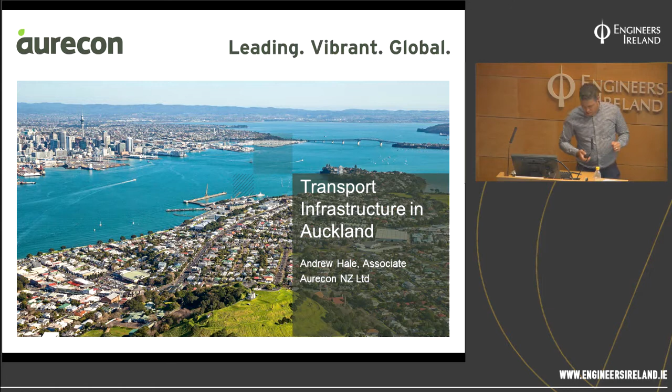So I'll just give a brief introduction to myself. As Oliver said, I graduated from Liverpool University in civil engineering. I was actually in the UK a bridge engineer, so I designed, inspected and maintained bridges for approximately 7 years. Those 3 companies there: Mouchel, Atkins and Carillion. Atkins is probably the one you guys would know. The Mouchel joint venture was an organisation in the Lake District, looking after the bridges on the M6.

After 7 years in the UK, I thought I'd go and see what's happening abroad, and I was only supposed to be there for 2.5 years. 10 years later, I'm still there. Whilst I was in New Zealand, I became chartered with the Institution of Civil Engineers, and recently, late last year, I actually became a PMP with the Project Management Institute in the US. I also, around the same time, became a New Zealand citizen, so I'm actually a Kiwi now. And I've been leading the transport project management team in our Auckland office for approximately 2 years.

Since 2006, when I joined Aurecon, the transport team only had around 25 people. Now we roughly have around 110, 120 people in that transport team, and it's mainly down to the project I'm just about to show you.

So Aurecon, you probably haven't heard of Aurecon. No, nobody's heard of Aurecon? They're not in Europe, they're mainly in Australia, that's where they have the biggest presence. It was previously called Connell Wagner. It merged with 2 South African companies, so they now have a presence in South Africa, the Middle East, Southeast Asia, but mainly in Australia. Currently around 7,000 employees. It's privately owned, so there are 900 shareholders, which I'm one of.

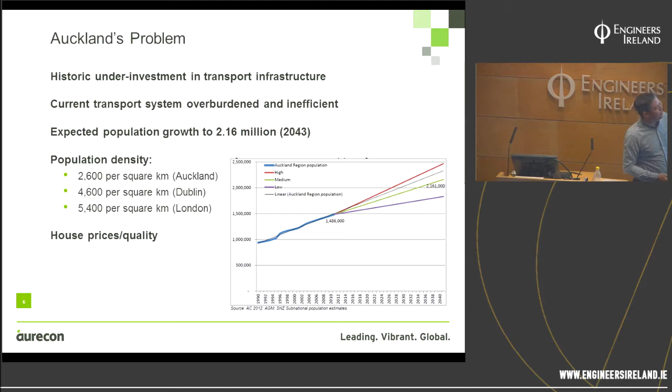They've tried to solve it by bringing in the Auckland Plan. As part of this plan, they want to become the world's most livable city. There are rankings, one from Mercer and the other from the Economist Intelligence Unit. What they're trying to do is become number one, but when they assess infrastructure in Auckland, it brings it down a peg or two. At the moment we're third with Mercer and ninth with the Economist Intelligence Unit.

The Auckland Plan is a new plan that the newly formed council has come up with. They want to become the world's most livable city, and they're going to invest in infrastructure as part of that. I'll show a few videos, not too long. This one's probably the longest, and it'll give a snapshot of the problem happening in Auckland and how they're going to solve it.

I'm starting here in Pukekohe because there's already a lot going on. There are new suburbs, schools, shops, roads in, roads out, which is great if you're looking for a more affordable home. But chances are you'll be working north, and that means you'll want to drive, but so does everyone else, feeding even more cars into Auckland.

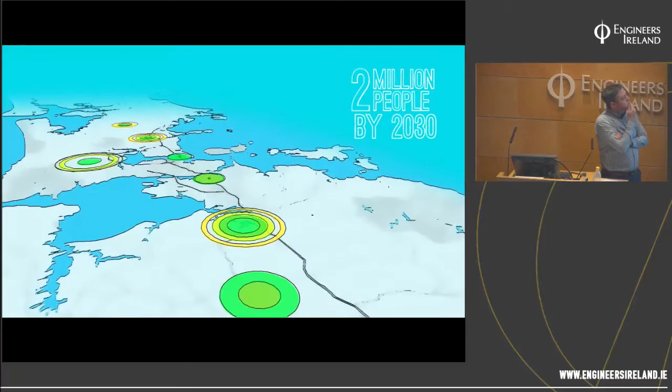How many more? Well, look at it this way. Every year more people call Auckland home. Over the last 3 years, we've grown by over 93,000 people. That's a new Aucklander about every 17 minutes. If we continue at this rate, our population will reach 2 million by 2030. Which of course will mean more roads.

A motorway lane transports less than 2,500 people per hour. A rail line can move up to 10 times that many. That's why we're working hard on our network now. Our new trains are already helping to ease congestion, making life easier for commuters and leaving more room on the roads for business.

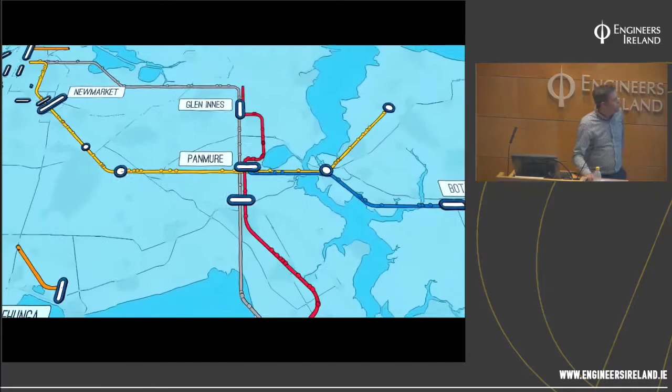But we're not putting all our eggs in one basket. We're improving bus services with better bus lanes, more frequency and bigger buses, even double-deckers. And we're already making it easier for buses, trains and ferries to link up seamlessly. With more choices and better connections, the new Metro network will provide frequent bus services running into suburban transport hubs, from where rapid services will feed in and out of the central city and to other major destinations.

And it's not all about getting to and from work either. It's about joining the dots for our everyday lives, for schools, sports, weekends, and getting together with family. That's why we need a range of solutions, like developing an exciting light rail network to extend our reach. And of course, increased frequency will allow us to just turn up and ride.

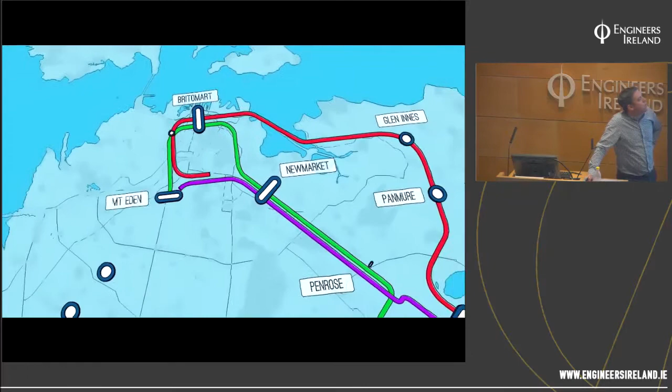And with investment in smart, safe infrastructure like this right now, there'll be more choices for commuters than ever before. Here in Britomart Station, everything comes to a dead end, but once the trains carry on through in both directions, there'll be twice as many. With the City Rail Link and other changes, our transport network will be more connected. Travel times will tumble, and commuting for everyone will be easier than ever.

Of course, new technology will make it easier to pay, keep us on time, and better informed. But it's not all about trains, buses, light rail and bikes. We're a coastal city, so is there a finer way to travel than this? And with another million Aucklanders on our doorstep, we're going to need a bigger boat or two.

To create a truly livable city, we need long-term solutions, not just quick fixes. We're also developing a far better way to pay for your journey from one end to the other, including transfers, all using your AT Hop card. Easy. Around 31,000 more people a year will be settling in Auckland, ready or not. So when it comes to transport, we need to be ready.

So hopefully that gives you a good understanding of what's going on in Auckland. I think when I was in Britomart Station, one of the projects there, City Rail Link, which we've gone about, is a transformational project. I've left that to the very end of this presentation. It's a bit like a mini Crossrail, obviously a lot smaller because it's not London.

So the project I'll cover today is, as Ollie said, completing the Western Ring Route. This is a New Zealand Transport Agency project that's been split up into several packages, you can see there. The biggest one is called Waterview Tunnels, which is probably a €900 million project. The two-bore tunnel is the biggest in Australasia, in Australia and New Zealand.

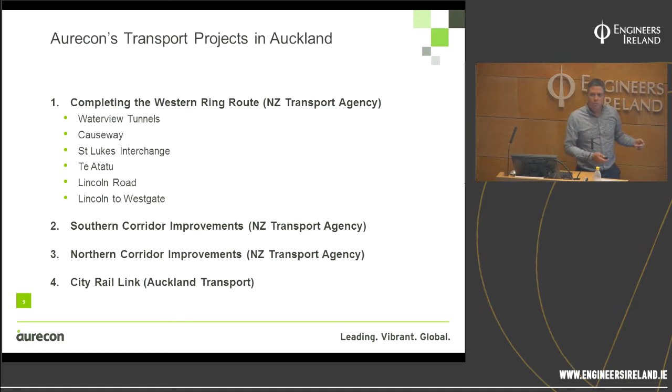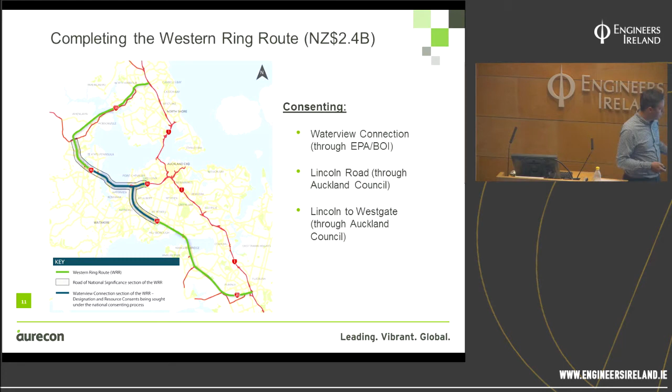This consenting package, consented all as one, is approximately $2.4 billion New Zealand dollars worth of work. It was consented altogether and then packaged up to be procured and constructed separately under different physical works contracts. Hopefully that makes sense.

So there you go, these are the different packages. There's a package down here which was being designed prior to me actually arriving in New Zealand. There's the Waterview Tunnels, a separate package, and then packages 1 through 5 all the way along State Highway 16, the Northwestern motorway, which is widening the existing motorway. There's a few interesting facts about certain parts, particularly the Causeway, which gets inundated with high tides and also goes through a national marine reserve. We're trying to build something in something which is protected. So that gives you a bit of context for the Western Ring Route and the Waterview Tunnels.

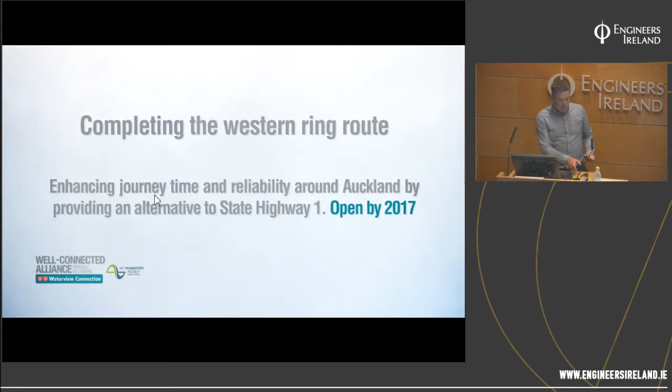I'll show you another video, with the times up there again. I'll probably have to narrate this one because I don't think there's any music to it. There was music to it, but then they decided to take it off.

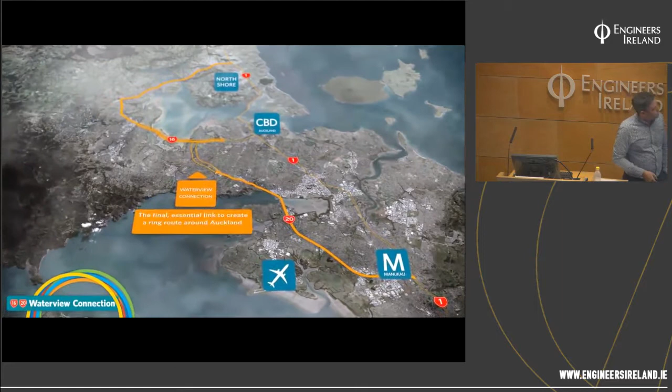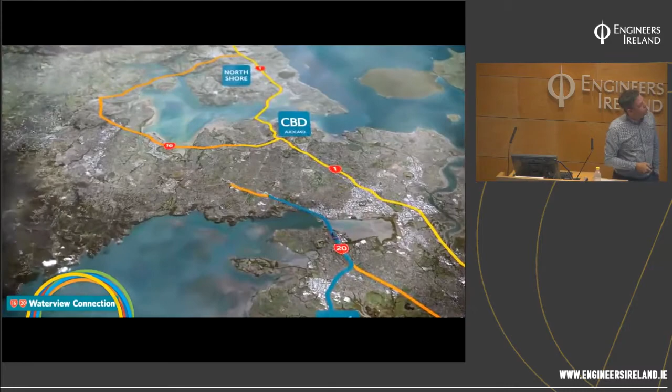It's just going to show where it is in context with Auckland. For some reason, when they were advertising the need for the Waterview Tunnels, it was all about getting to the airport, to the CBD, in the quickest time possible, rather than trying to redirect traffic around the CBD. Originally, the connection with the CBD ramps wasn't in the project, they put those ramps in at the very last minute. So now, to get from the airport to the CBD, you basically have to go down some local roads to get into the city.

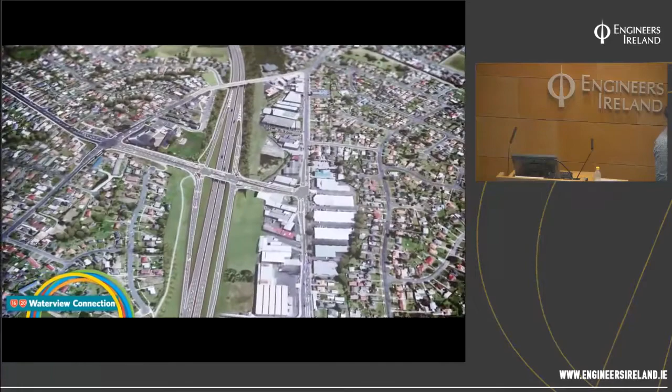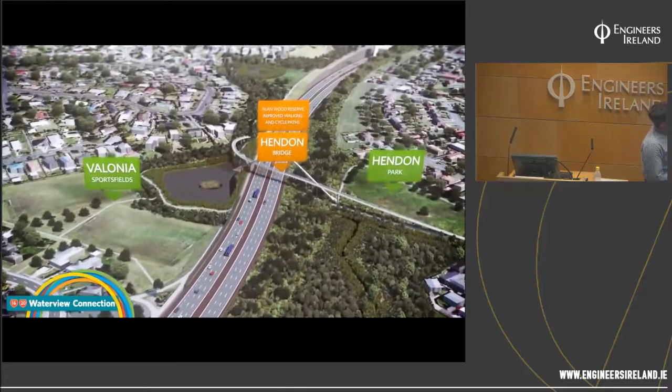A nice visualization. You're coming up to the southern portal - the actual project starts here. Going towards the southern portal there's a nice architectural bridge, Hendon Bridge, then it dives into the portal and into the tunnels.

One of the main reasons for the project was to miss a supermarket, because it would be too expensive to buy the supermarket. So you'll see it come up now.

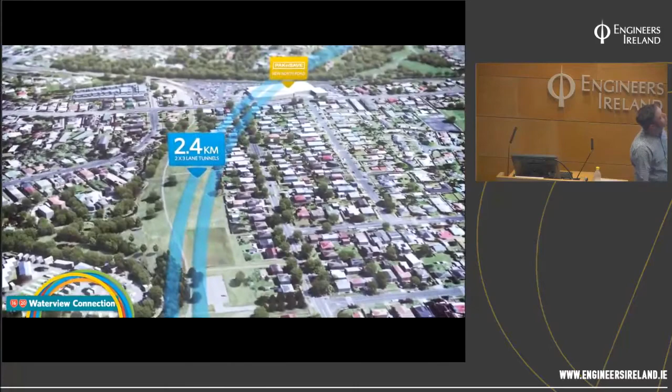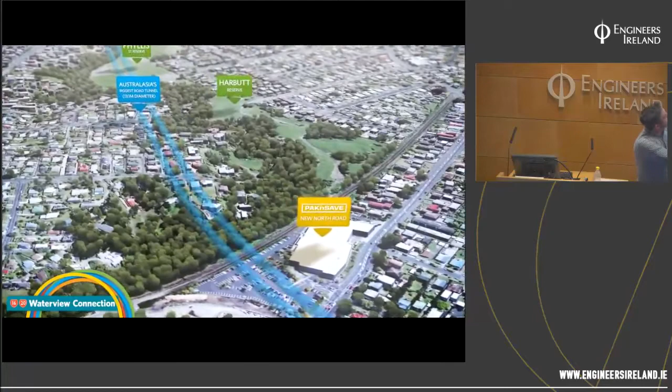Australasia's largest road tunnel. I believe the WestConnex in Sydney is going to trump that though, which is currently being designed.

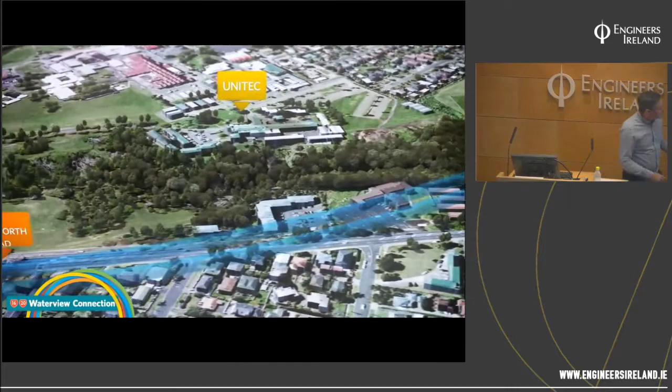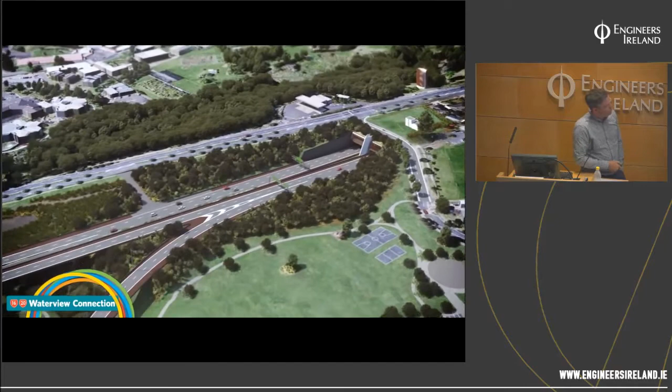It comes out, you see one of the stacks there, so it comes out in the northern portal. And then you'll see the ramp connections with the existing motorway. I've got a few photographs of where this is currently at and what it looked like probably a few years ago.

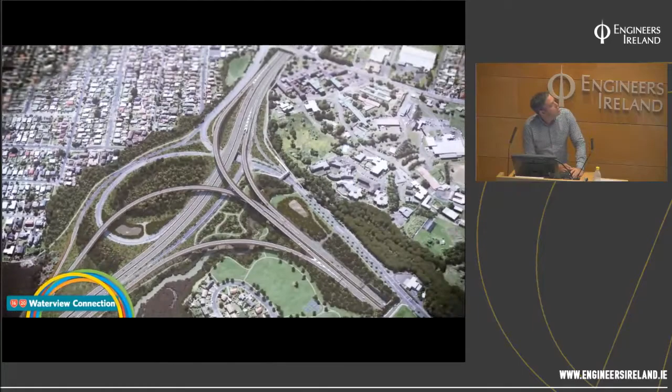I'll show you the second video, which has got sound, because the tunnels have actually finished construction. They've got a little video.

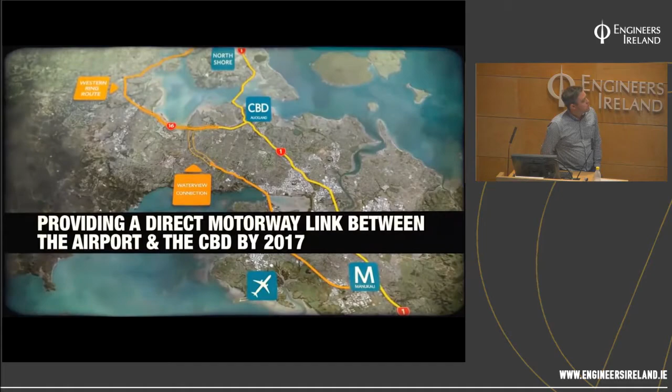So the tunnel boring machine is called Alice. I think you have to name a TBM after a lady. So down the rabbit hole, Alice.

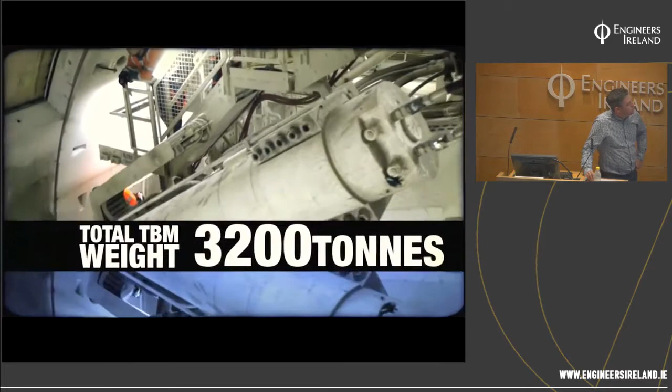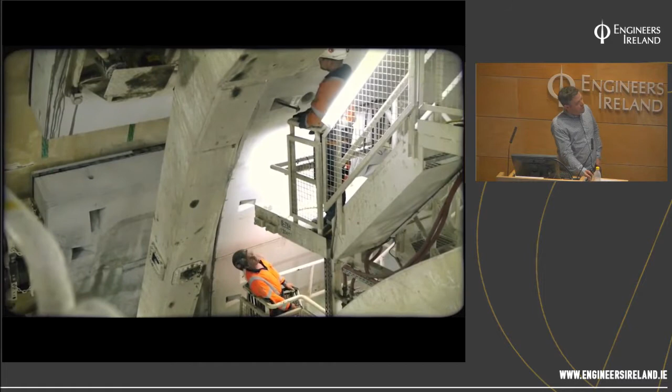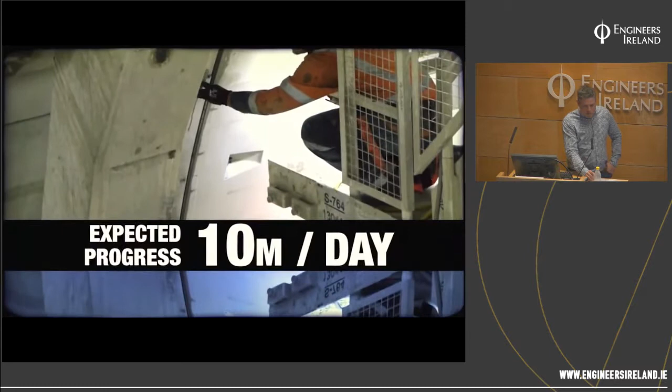So Alice finished her journey in October last year. They're currently fitting out the tunnels with all the M&E, the ventilation, the deluge system. They're hoping to get it open by Christmas this year, but they're saying to the public at the moment March next year.

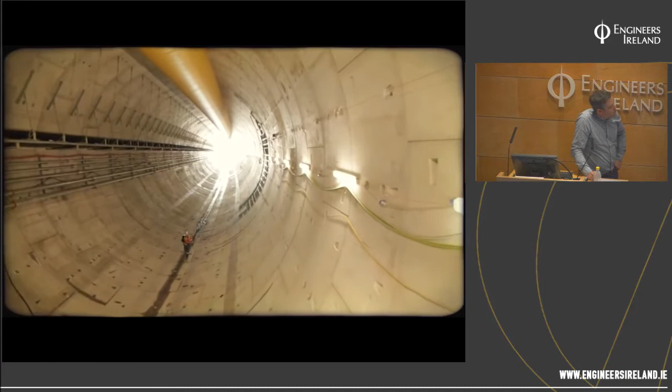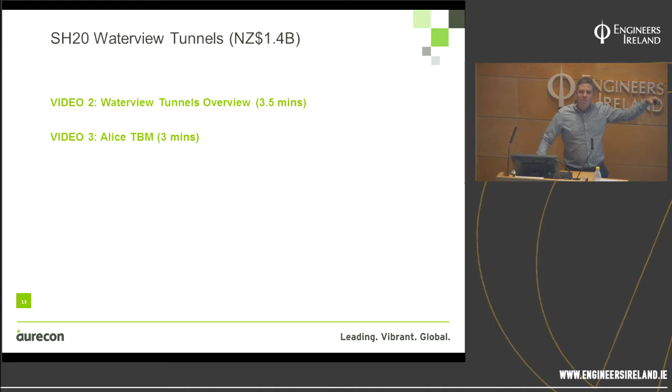So Aurecon are not actually part of the alliance, we're the client's advisor. So let's just go through a few facts of what Aurecon provided to the client.

We helped get it consented in 2011. The final parts of the consenting process and the procurement were undertaken in parallel, and we awarded the contract in 2011. Now, the procurement process was an alliance.

I don't know if you have alliances here, but it's where you get a contractor and a designer on board, and they're allianced with the client as part of the team. But because this is a project of such importance to the agency, and they didn't really know how to construct, maintain and operate tunnels, they leaned upon us to give them advice on what to do.

Certain advice we gave them was to look at, as part of the contract, putting in a maintenance and operation clause for 10 years after construction. It's really to ensure that they're getting a good quality product that doesn't cost a lot of money to maintain and operate.

We managed this, so we came up with the specimen design. Our competitor decided to try and go for the alliance process with a contractor, and the transport agency came to Aurecon and said, please can you fulfill this role for us? So we ended up taking the design that was going through the consenting, came up with what was called a specimen design and the requirements for the contract, then helped manage the tender process, which was a competitive alliance, and then we evaluated it.

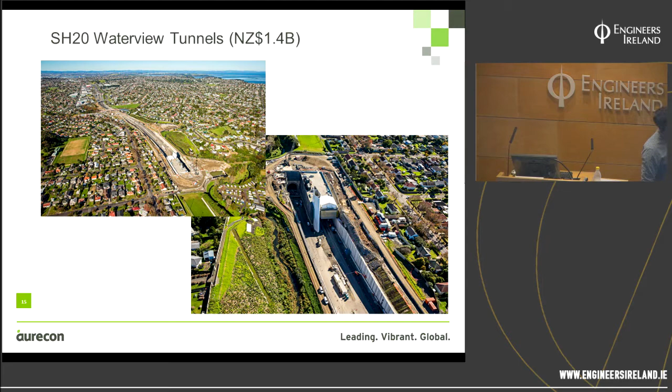I've been told. This is just some of the aerial photographs, I think these ones are actually really recent - taken from June, which is this month, so early June. This is of the southern portal. You can see they're making good progress on the tunnel stack and the building within the portal.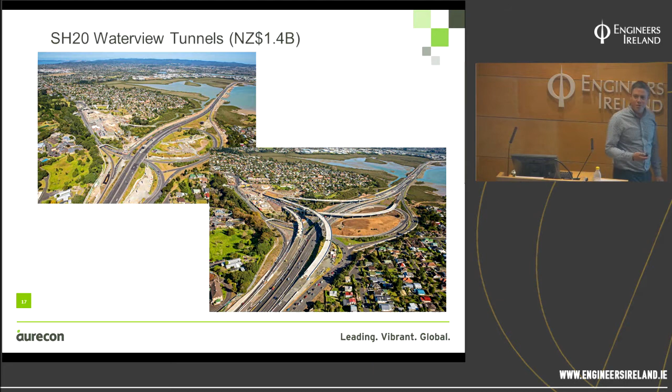And there's the northern portal at the moment, so you can see the ramps there. Nearly finished construction - I think they've actually finished construction of the bridges pretty much now. This one is sort of a before and after: that was taken in 2014, and that's from June this year. So some people think it's a monstrosity, but engineers are quite excited about this. Just going to flick through the other projects now, just to give you an understanding.

You need to prepare the existing infrastructure for this additional traffic, because when the Waterview connection opens, what's actually going to happen, nobody knows. Traffic modelling can't really predict it, it's just a complete guess. So the transport agency at the moment are really worried about how, once this opens, it's going to change how people travel around Auckland. They've got several traffic models currently running, and they're identifying areas that could be a problem, asking can we do something in the next 6 months so it doesn't become one? Because there's that reputational risk - opening something that costs this amount of money for such a small country as New Zealand, and then it doesn't work, it's not a good look. So they're currently running those models at the moment.

But I'll show you what they're trying to do on the existing motorway, which is in the other 5 packages. So St Luke's, which is the one closest to the CBD - again, that was consented as part of the overall project. It's a traditional procurement process, so we did the detailed design and then got it tendered. We produced the construction drawings, got a contractor on board. We did that in 2013.

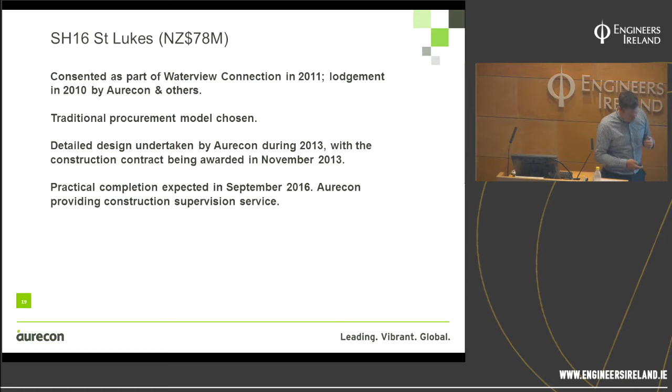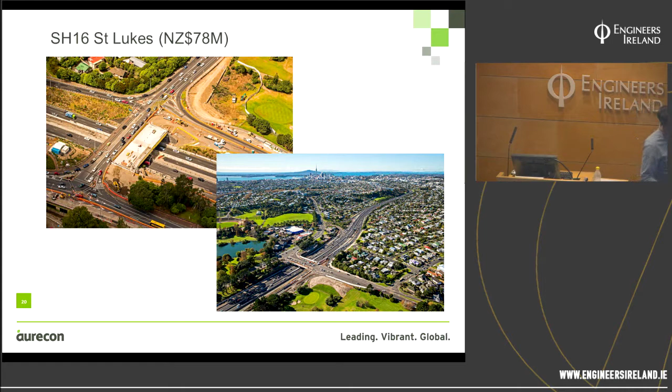We awarded the contract in November, and its practical completion is going to be this September. We're providing some construction supervision on site. This is what it currently looks like - you can see the CBD in the background. So we basically duplicate the bridge and widen the motorway to take additional traffic into the CBD.

Causeway, which is an interesting project where me and Ali worked on this project for probably a good 3 to 4 years.

As I said at the beginning, climate change and sea level rise played a big part in our design requirements for this. The motorway, which is a main arterial road into the CBD, in certain weather events actually gets inundated, as you can see there, closing the motorway. It's not just a case of the sea retreating and then you can open up the motorway - there's actually a lot of debris that you need to clean up. It takes a long time to reopen the motorway, and as you can see, some people actually canoe along the motorway.

So there's a lot of work that we did looking at what are the predictions for sea level rise - low, medium, high - and how much money the client has to spend, trying to get that better balance and best value for money.

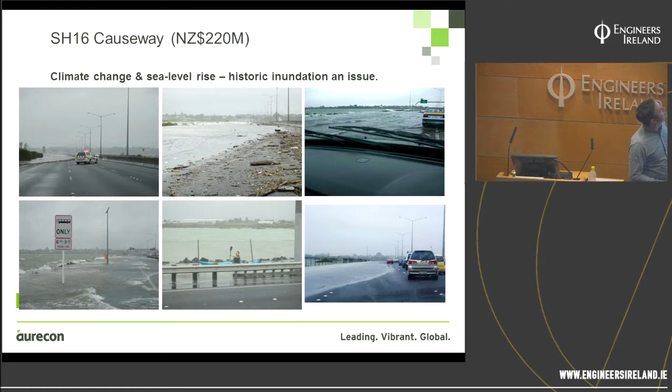So again, considering the Western, the Waterview connection, going across on that causeway through the marine reserve, it's going through some quite soft ground conditions. Long-term settlement is an issue, so we studied many different ground improvements to look at which one would be the best one.

We took that into the competitive tender process through the Alliance, and we did the specimen design and tender management. Because we wanted the contractor to bring some innovation to the project, we allowed minimum requirements in the contract for them to challenge some of the things in the specimen design. In the specimen design we had soil mixed columns, basically cement and soil mixed together, which we thought was the best value for the client, but the winning alliance actually decided to put in wick drains, and I think they ended up saving $80 million.

But there was a residual risk there because with wick drains you have to preload the area. That solution actually has a lot of risk associated with it because of the timing with getting rid of that settlement.

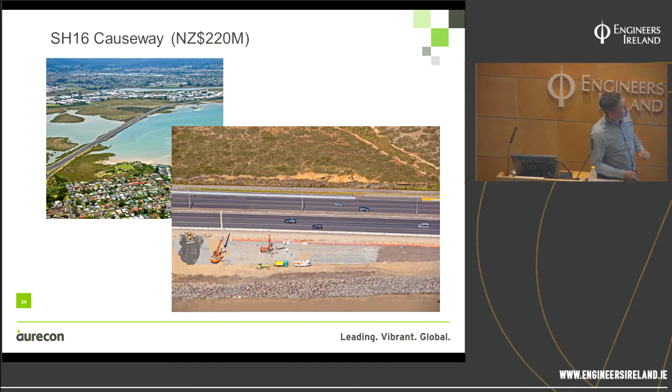Te Atatu, which is this small interchange here, that was design and construct, again consented as part of the overall Waterview connection project. Again, we did the specimen design and the tender management. Contract was awarded in October 2013, and it was actually opened a couple of months ago.

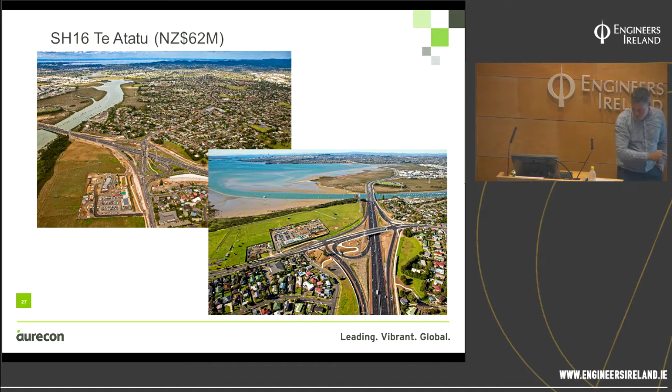You put the final surfacing on, and that's the final interchange layout - can't really see that, it's not a great resolution.

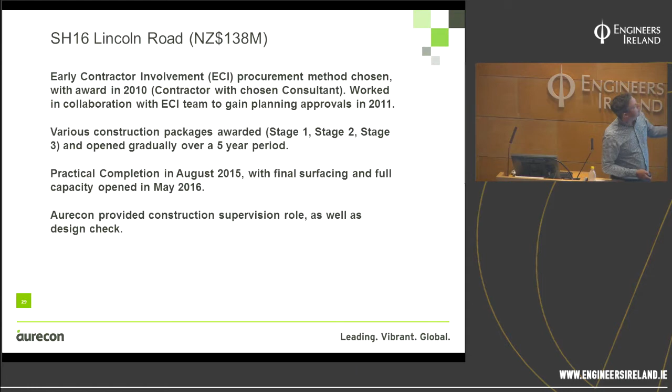Lincoln Road - this project wasn't part of the Waterview connection project. This was around the time of the global financial crisis, and the New Zealand government wanted to start injecting some money into the local industry, so they decided to speed things up. They chose early contractor involvement and started awarding the construction packages in certain stages, gradually over a 5-year period, ending up costing $138 million. I don't think that was the best use of the government's money, but got something built from it. Again, that was opened in May 2016.

Showing some of the photographs there - some of the construction of a new bridge over an estuary, a new interchange, and actually demolished the existing bridge.

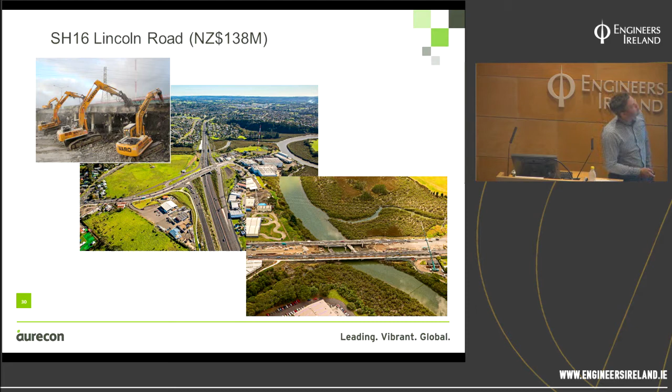Final one, which is linked to Westgate. They were unsure of when they were going to undertake the work on this project, because it's so far away from the tunnel. And again, the traffic modelling is a complete unknown, but some of the traffic models were saying you could actually get queues going back into the tunnel, even though it's maybe 8 kilometres away.

It's a safety hazard, having standing traffic in the tunnel. What they've actually done is completed the detailed design, so it's gone through traditional procurement. Hopefully, whilst they've been away, it should have been awarded to a contractor, and it's due to be completed in February 2019, after Waterview Tunnel opens.

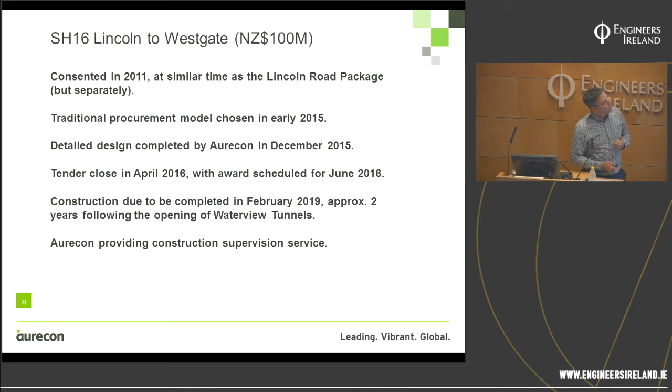I haven't been too involved in this project, as I'll go through some of the projects I have been involved in. As part of this project, they'll have a separable portion where they'll open up the traffic lanes going away from the tunnel first, so that if there's a problem with traffic queuing back into the tunnel, they can hopefully get that traffic away as quickly as possible.

So that's completing the Western Ring Route, and Ali wanted me to really concentrate on that. We've probably flown through it, and there are all different little stories within that project. But we decided to pick off 2 projects that we've recently won and are delivering, and have delivered.

So, Southern Corridor improvement. I mentioned at the beginning this project, the Manukau Extension, which was opened in 2011. When they opened that, they were basically putting 2 lanes into 3 lanes, which then went into 2 lanes just off the map. And when they opened it up, it came to a complete standstill.

The project we're talking about here is a project to sort out those problems. So Aurecon competitively bid for this work, and because of all the work we did on completing the Western Ring Route, we could put a really solid bid together, knowing exactly what the client wants. We've done it before, so they can trust us.

We were commissioned back in March 2014, and this was what they called an accelerated project. We had to get this delivered, or a certain portion of the works, by the time the tunnels opened. The tunnels were at the furthest end of the Western Ring Route, and Southern Corridor improvements is at the furthest end too. Once the tunnels opened, you're expecting quite a lot of increase in traffic trying to join State Highway 1 in Southern Auckland.

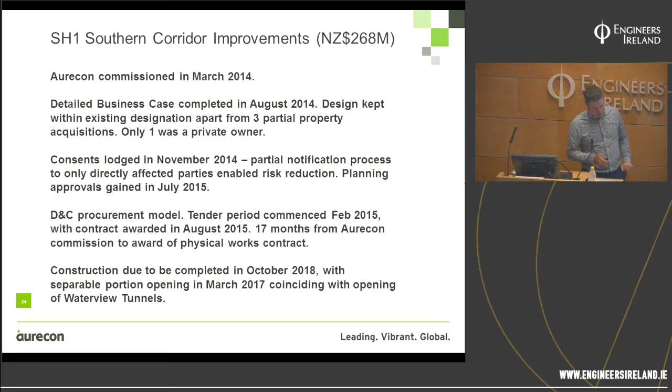We also had a design competition for an architectural footbridge. That was the winning design, though it wasn't the actual contractor that won the job, and we told them to build that bridge there. There's also a bit of regeneration happening, where we're taking some of the land used for maintenance and providing a park, getting the local community to connect with their local harbour as well.

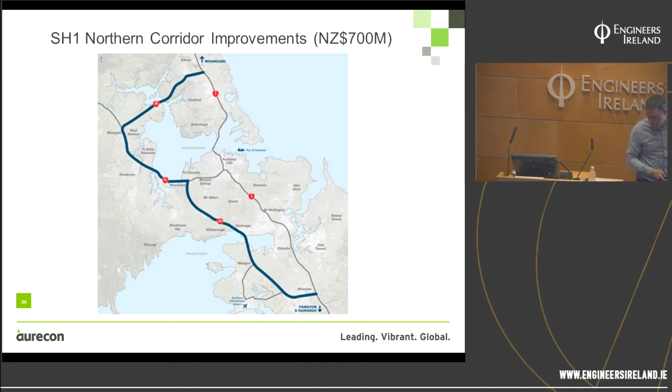So we completed that work in August last year, and then this job up here came out to tender. We went from completing this work, getting it out to contractor, sorting out the stuff down here, and now we're looking at how to connect the northern end of the Western Ring Route into State Highway 1. We only got awarded this job in March this year.

We're currently doing some public consultation - I think it was the weekend I flew out of New Zealand. We're looking at connecting the top of the Western Ring Route with State Highway 1, but also at the same time there's an existing busway which stops at a place called Constellation Station, and from there we're going to extend that busway all the way through to an existing station called Albany, plus provide an additional bus station somewhere here as well.

There's a national hockey centre which is actually going to be affected by this, and we're just trying to look at whether we relocate or reconfigure those hockey facilities.

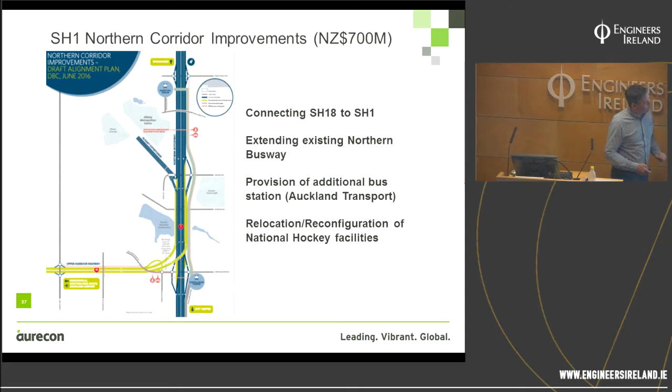We're still going through the design at the moment, and we're looking to lodge - again it's going to go through an EPA Board of Inquiry process - but we're looking to lodge that in November this year, and start the tender process again with the competitive alliance next year to get it awarded late next year, with construction due to be completed in December 2021, which is a date that's been given to the government, which we can't fail on.

So this is after the Waterview Tunnels are complete, and we're looking at staging that construction to try and minimise the traffic effects on the local and motorway network.

Okay, so City Rail Link. Those were all New Zealand Transport Agency projects, quite sizable sums of money.

At the same time, we were asked to bid for this work, providing a similar sort of advisor role for Auckland Transport. The Waterview Connection was the biggest transport infrastructure project in New Zealand history - City Rail Link is going to trump that one.

I've got a few videos to show you. They're only about 1 or 2 minutes long, but the project is quite a transformational one.

As you saw in the first video, the current rail network comes to a dead end at Britomart Station. What's going to happen is they'll drive that train infrastructure through the centre of the city, using a few different methods of tunnelling - cut and cover, top down, TBM, and mined stations. So it's got a similar feel to, but is a smaller project than, Crossrail.

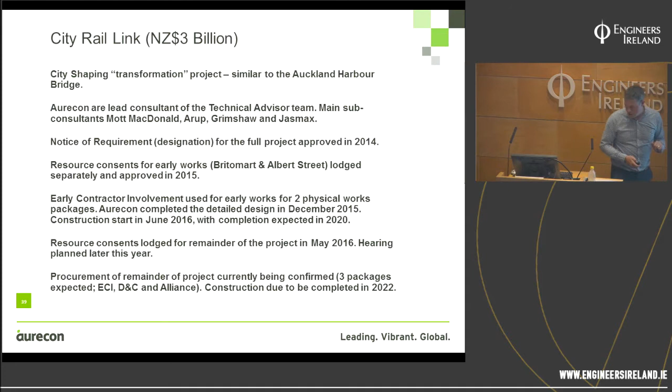So I've got 4 videos for this, and they're all quite short, but they'll give you a good idea of what the project's all about.

The City Rail Link is the heart of Auckland's transport system, connecting the city centre to the rest of Auckland. Now trains heading into Britomart hit a dead end.

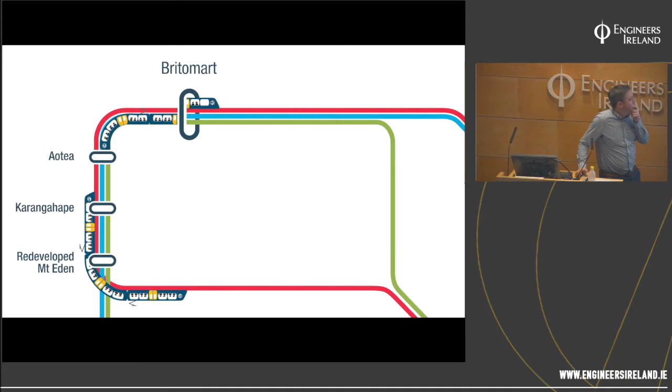By pushing through underground at Britomart and connecting the rail network, trains will be able to run both ways. This will double the number of trains that can run, delivering a train about every 5 to 10 minutes at peak from most stations. With 2 new underground stations near Aotea and Karangahape Road and a redeveloped station at Mount Eden, travel will be faster with better access to more parts of the city centre and further afield.

Taking a train from New Lynn to the new Aotea station will take only about 20 minutes. That's almost half an hour saved compared to now. This will mean the number of people within 30 minutes train travel of a city centre station will double, which is great for business and employment.

There'll be greater connectivity for the wider Auckland region too. For example, a trip from Otahuhu to K Road would be more direct, taking only 27 minutes.

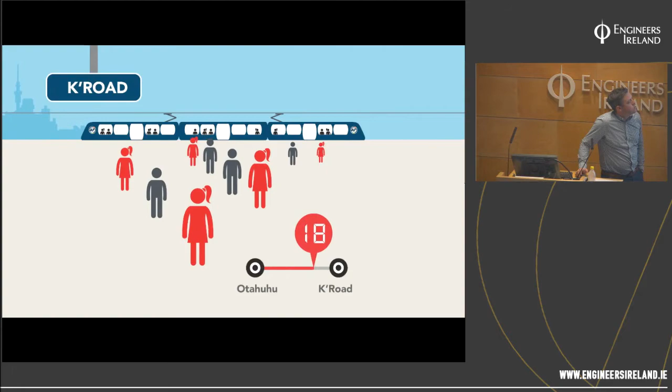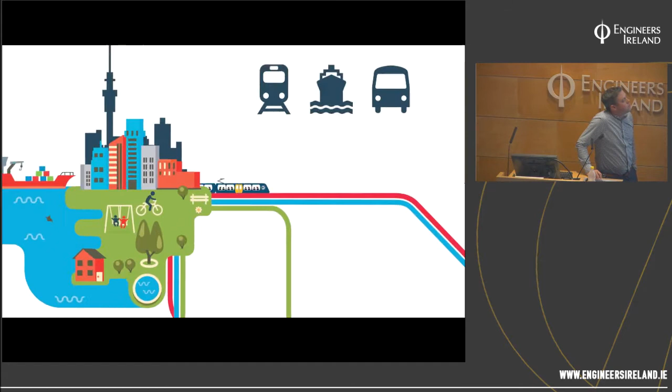With Auckland's population growing by about 700,000 people in less than 30 years, public transport needs to become a reliable and effective transport choice. With the dead end at Britomart, rail can carry only 15,000 passengers an hour. With the CRL, rail can carry about 30,000 people an hour in peak.

Compare that to a single motorway lane carrying just 2,400. More people on trains will free up roads for those who need them. The City Rail Link will also make it possible to expand the rail network to the North Shore via Wynyard Quarter and to the airport. The new City Rail Link, the heart of Auckland's transport system.

AT, connecting Aucklanders. So some of the other videos will show in a little bit more detail of what's actually going to be built. So this is a good one.

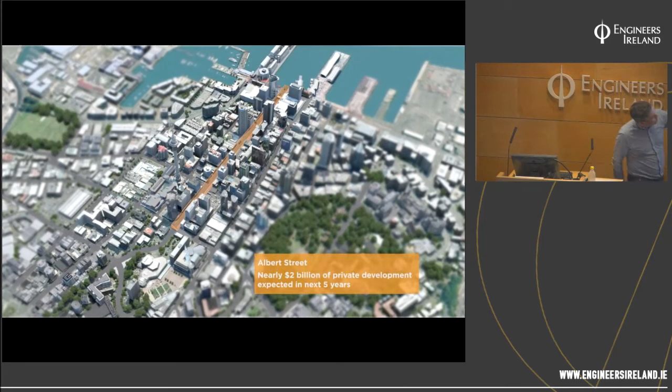So you can see the CBD, and because CRL's come along, and I said it's a transformational project, there's all these skyscrapers that have currently just started to be built.

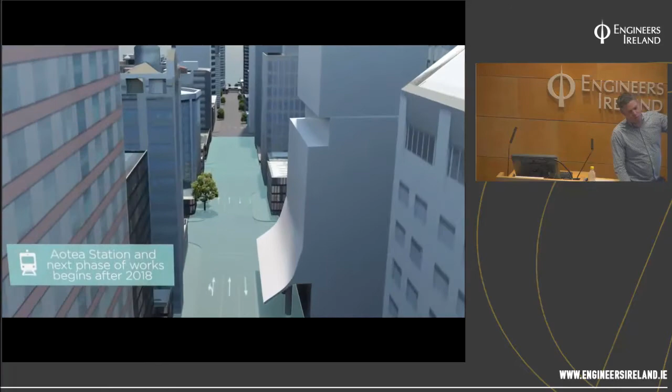You see the Sky Tower there. This is where one of the stations is going to be built, but that's part of a future package. And the enabling works, or the early works, is this cut and cover tunnel down Albert Street.

And it goes in underneath. This is where the shopping centre is, which is currently being demolished. It's just there. So that's Britomart Station just there.

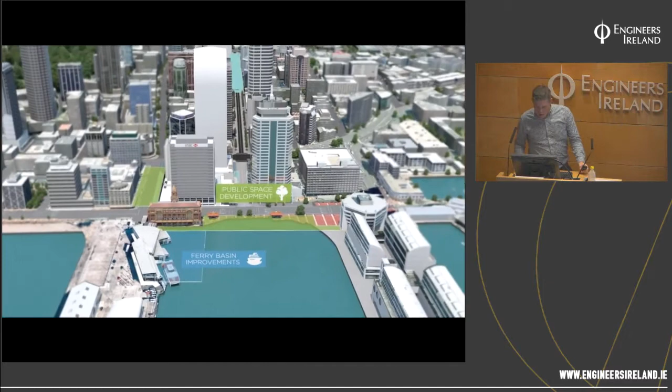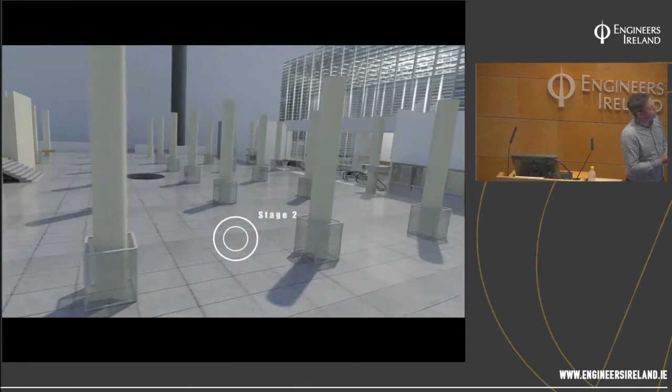And then I'll show you this, which hasn't been given to anybody apart from the tendering parties. So this is something that we came up with, let's say BIM, using digital. All of the stuff that we've designed has been in 3D. So that's Britomart Station, and this is how we plan to put the tunnels through underneath Britomart Station.

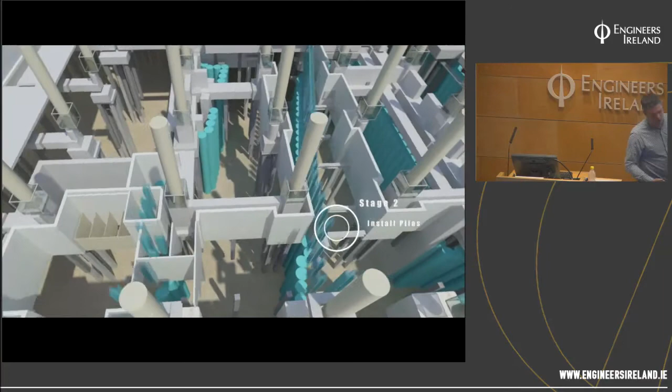So the Britomart Station is actually called the Chief Post Office. It's a heritage building, and we're going to be putting 2 rail tunnels underneath it. So it's very high risk. We had to show the contractors how we intended to do it, and they could come with their solutions, and we could talk to them during the tender process about how we would minimise that risk.

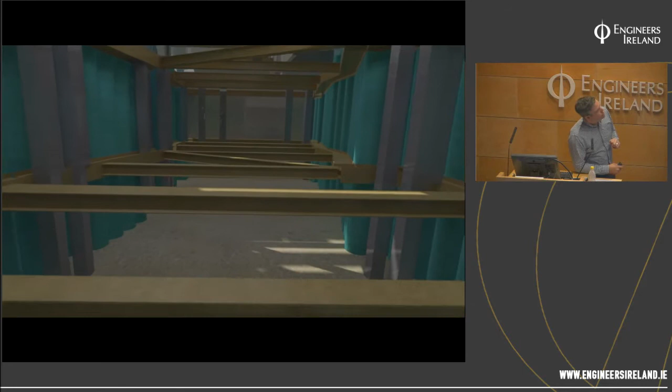So it'll go into the station. It'll probably show how the rail lines are going to be driven through. There you go.

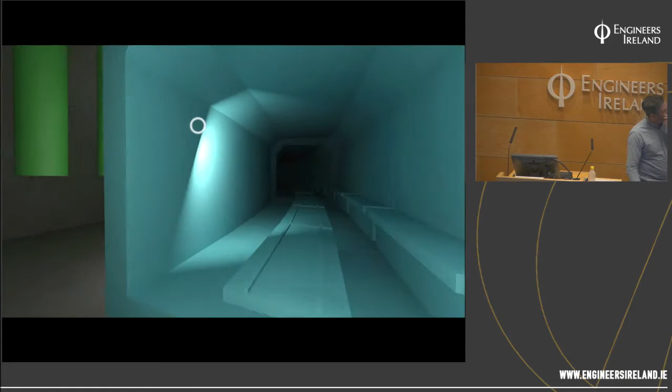It'll show how we're going to miss foundations for some of the buildings within the existing CBD and the services as well.

And I think the final video is, so we saw in one of the videos something about a redevelopment of Mount Eden Station. So what we did there — the project, the City Rail Link, will be the heart of Auckland's transport system, connecting the city centre to the rest of Auckland.

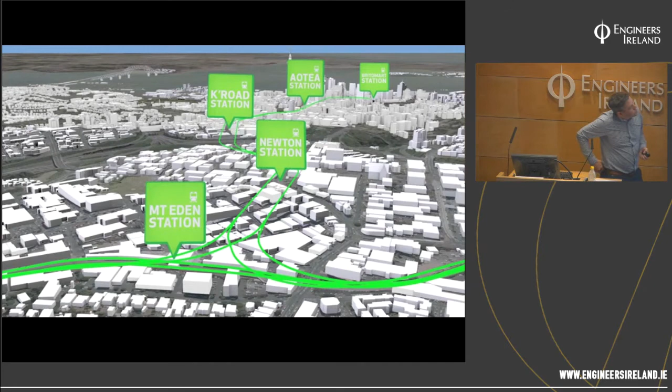Auckland Transport has changed the design of the City Rail Link, replacing Newton Station with a redeveloped Mount Eden Station. The change will improve rail reliability and reduce construction disruption, while also saving over $150 million.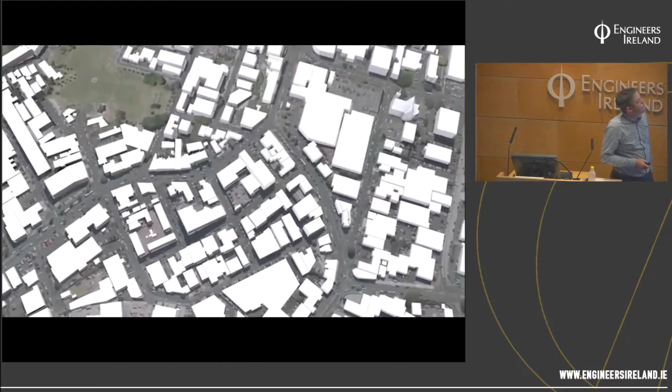The change has come from design work, which has challenged the initial concept and is continuing to refine the project. In the previous concept design, the City Rail Link bypassed Mount Eden Station, stopping at Newton Station 42 metres below the ground. Heritage buildings limited the potential for development around the Newton site, and there was a flat train junction where the lines crossed to head east and west.

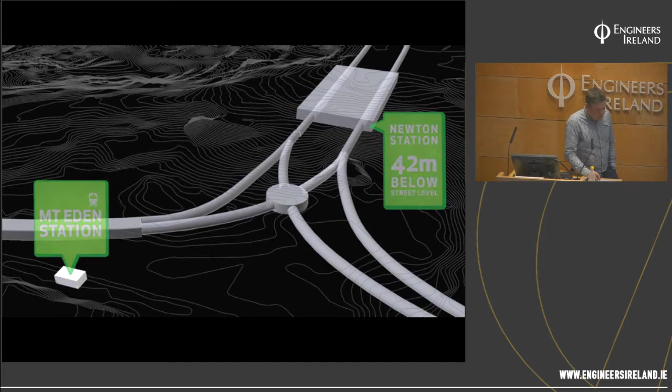With the new design, an additional platform will be added at Mount Eden to connect people to the City Rail Link, and the separated train junction will improve the reliability of the entire rail network.

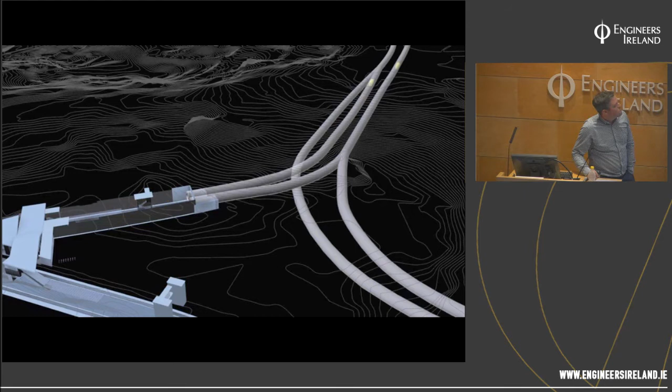The new platform will be in a trench, similar to New Lynn, with a station building connecting the platforms.

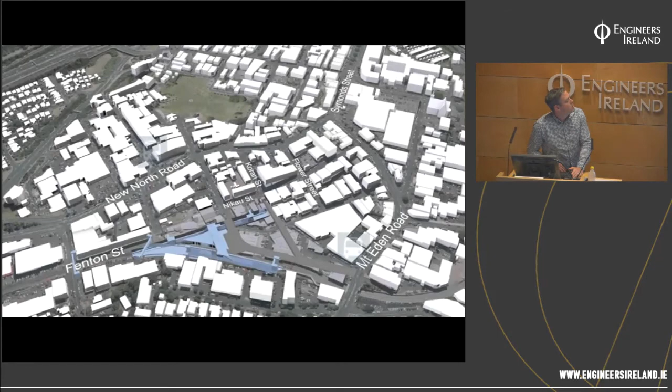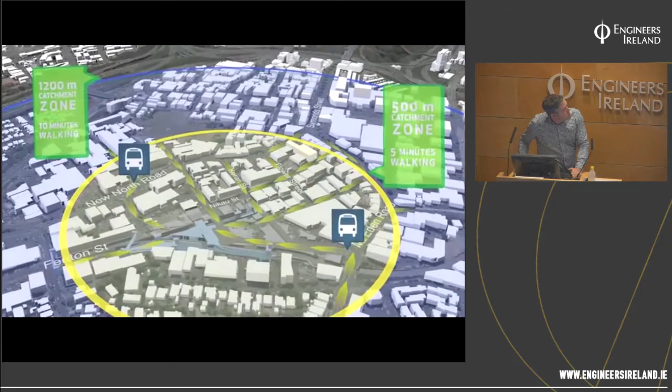Strong walking connections between the redeveloped Mount Eden Station and Symonds Street will be enhanced. There will also be greater opportunity for development around Mount Eden Station, with fewer heritage buildings, fewer view shaft restrictions, and redevelopment of the adjacent construction site after the CRL is operational.

Overall, the changes will make the CRL more affordable, more reliable, and less disruptive during construction.

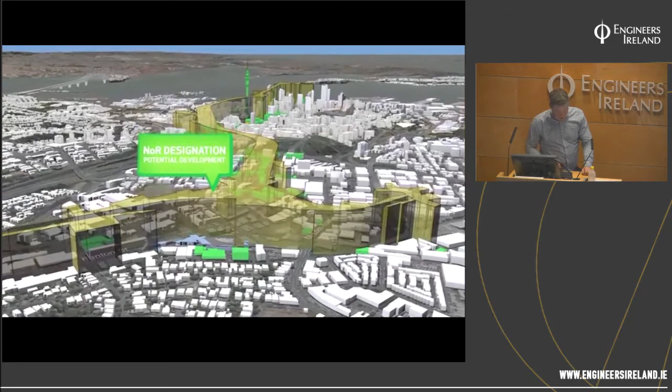City Rail Link, the heart of Auckland's transport system. AT, connecting Aucklanders.

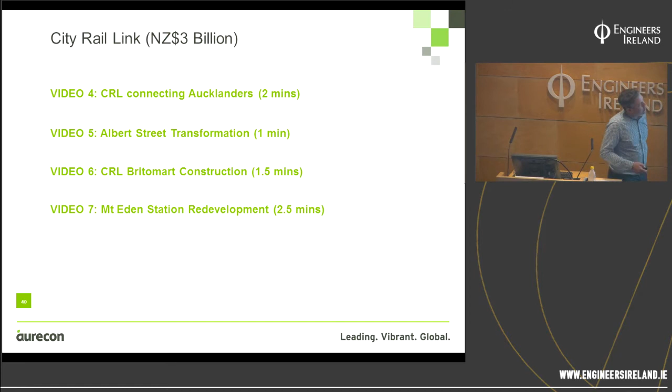So CRL is a huge project for such a small city, and it's really around the affordability. One of the things we did for Auckland Transport was really look at and challenge some of the high level decisions that were made at an early stage around where the stations were and where we could actually get some savings. I think 150 to 200 million was roughly what we saved by rethinking that outcome.

It doesn't just stop there. No, we're not going to show this video because it's quite long. I think I'm out of time, probably run over.

But it doesn't stop there. There's a lot of projects still going on in Auckland which Aurecon doesn't have any involvement with at the moment. So light rail, they're looking at putting trams, as you saw in the first video, and then extending it to the airport and up towards the North Shore. We're currently working, I think, with Auckland Transport on the extension onto the North Shore and converting that busway, as I showed in the Northern Corridor, to a tram network.

With the Transport Agency, they're looking at actually providing a new tunnel underneath the harbour to replace the bridge, which would be probably one of the biggest road tunnels in the world. And they're currently looking at connecting parts of the Western Ring Route to State Highway 1, which is a project called East West Connections. So there's quite a lot of opportunities in Auckland.

There's quite a lot of work. We're probably talking, that project there in itself is probably $5 billion New Zealand dollars worth of work. So it doesn't stop with the process I've just shown you. There's many more to come.

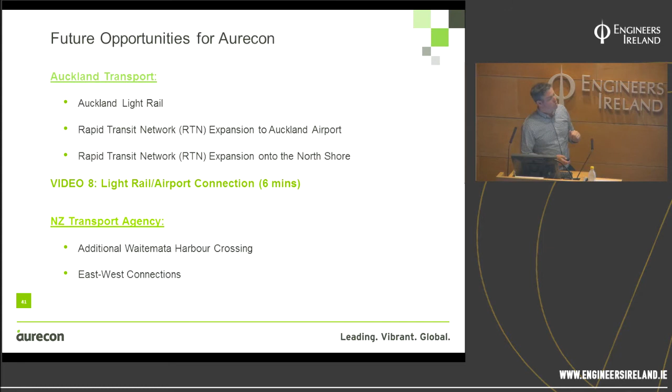So there is a big impetus in getting that infrastructure from where it is to something which will make it the most livable city. So I think that's it. And I think I've probably done a whole hour now. So apologies for taking up so much time.

Thanks, Andrew. You just brought me back a couple of years. It's been 15 years since I've been to Auckland, and I remember walking into that Bismarck building, is that the right? Yeah, the right, Bismarck. The Bismarck building, and good luck with that project. But it was the time around the America's Cup, and vaguely a lot of the stuff which you've shown me just brings back fond memories of visiting your city. Yeah. But I suppose most of the audience here would be very familiar with the issues which Auckland is experiencing at the moment, and there's an awful lot of similarities with what Dublin has gone through in the last 15 to 20 years.

So I'll just open it out to the floor to see if anybody has any interesting questions for Andrew. Donald is going to... I suppose do you want to stand here? You covered so much ground there, phenomenal presentation, but even just the latter part of the presentation, you talked about the city rail link and the massive impact it was going to have.

How it was at Britomart then stop, turning into both directions and even doubling the capacity. I'm just conscious that I'm aware of in Melbourne this 50 level crossings project, like 50 level crossings, worth like $6 billion. And it just occurred to me that when you're programming in the development of such an ambitious project, does that in turn trigger the need for multiple level crossings to be addressed in Auckland, and as a consequence, because there's double the amount of traffic through it, they become less functional and more disruptive?